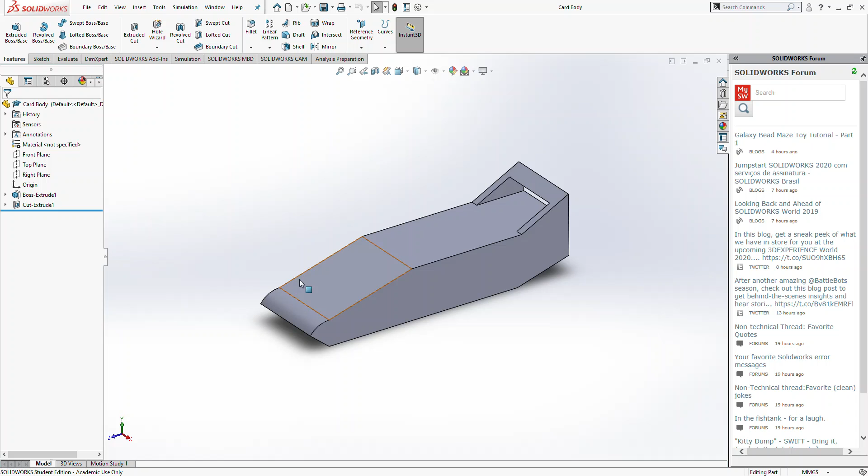In this video, we're going to look at the Revolve Boss Base tool and eventually generalize it to how the Revolve Cut tool works.

Both are the same as the Extrude Boss Base and the Extrude Cut, simply being that instead of going out in a straight line, it's actually going to revolve around a certain axis.

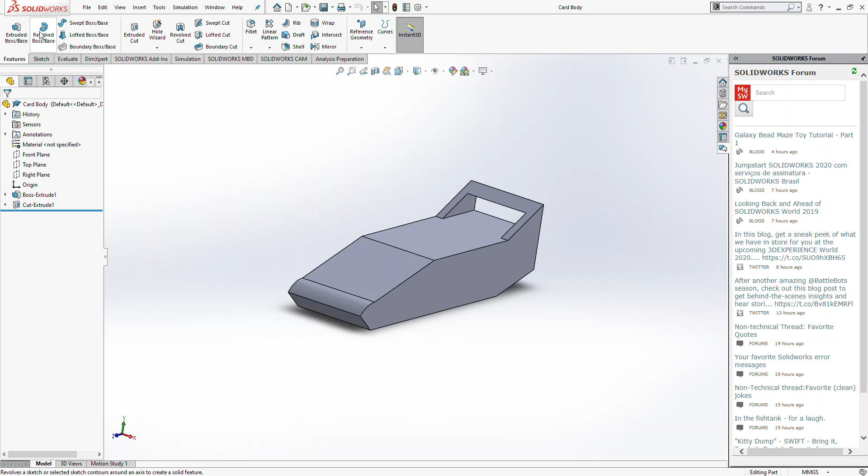So we're going to use this tool to create wheels for an actual car.

So we're going to go to File, New, and select New Part, and just open up a new part document.

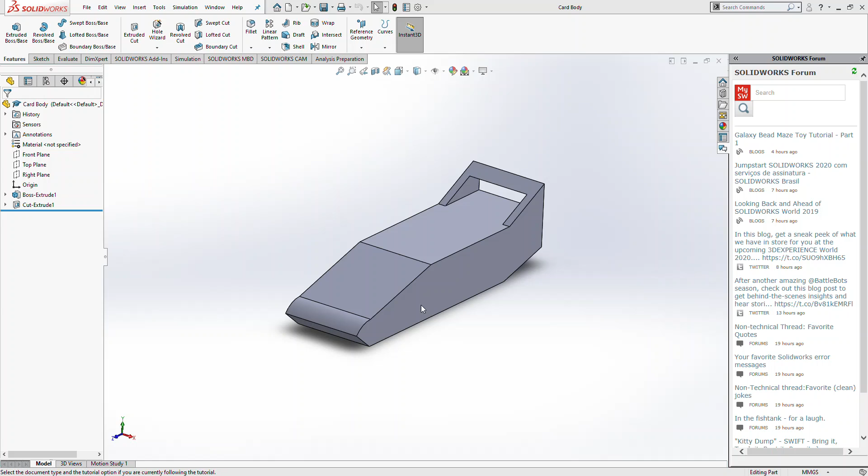Now what we're going to do is go to Sketch. As we know, all new parts start out with a new sketch. We're just going to go to Sketch and probably do this in a front plane, because we'll want the wheels to turn in a certain way.

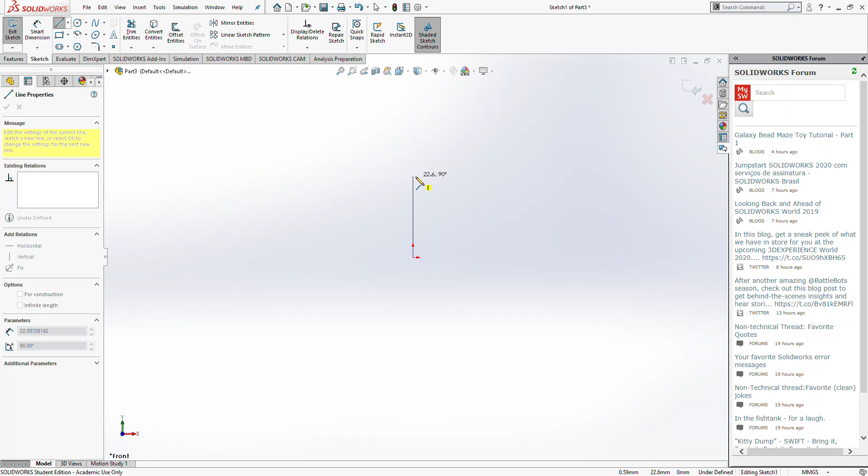So looking at this, let's start out with a basic looking wheel frame. Since we're revolving this wheel around a certain point, you're only really designing half of the wheel, or the wheel around an axis. So we want our wheel to be a certain radius length.

And then say have a certain thickness, have maybe slightly a bit of a rim to it, go down, have kind of like a center hubcap looking thing.

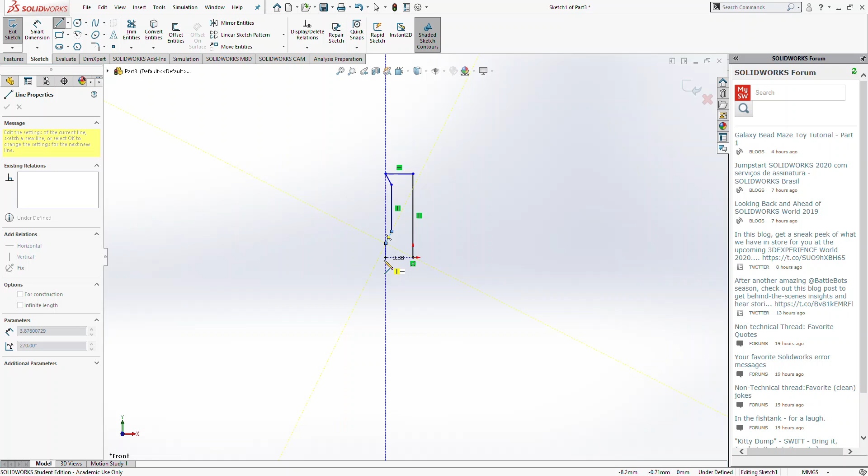So you can see it's a very basic shape that I've drawn with some lines. It's nothing super complicated, and it might look like just a random shape. But the neat part is when you actually begin to extrude it.

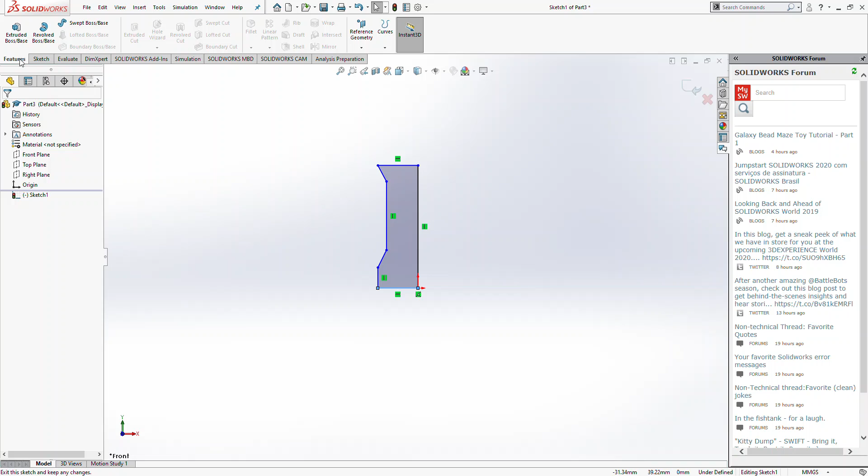So now that we have our basic sketch, you don't even need to exit the sketch. We're going to go to Features, and we're going to select Revolve Boss Base.

So looking at that, it's kind of a weird perspective, but as you can see, you have that outline traveling all the way around the part.

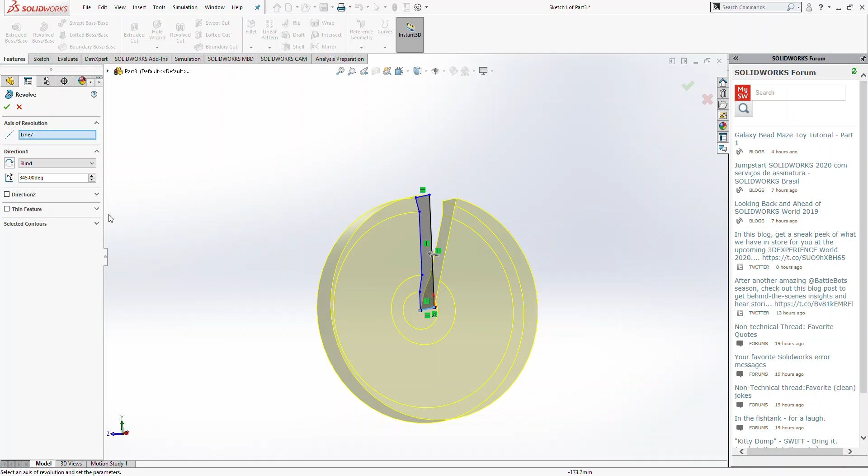So we could change the degrees of the part. That would mean, looking at a better angle, you can change how much you want the part to move around. If I wanted to, I could simply make this 345 degrees, and now we have a Pac-Man looking part right here.

Since we actually want our wheels to be functional, we're going to make the whole extrusion 360 degrees around an axis.

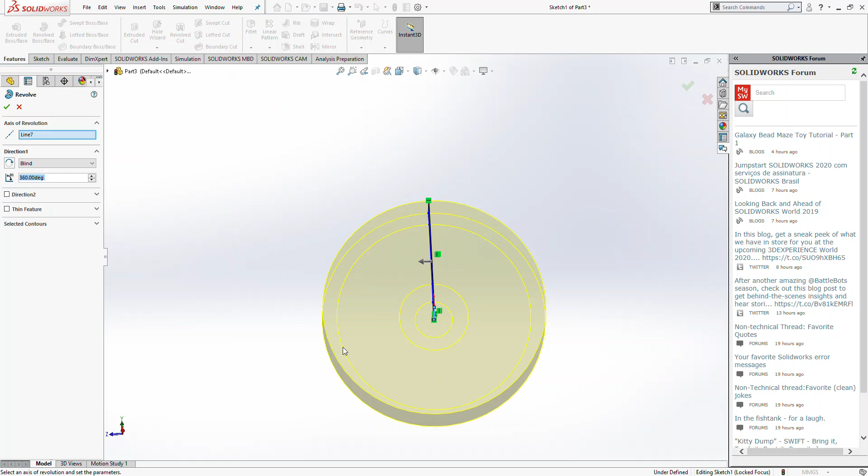Now the actual SolidWorks model does take a certain axis of revolution to be the default at the bottom, but I could easily change it at the side and make it look like a little cylinder thing.

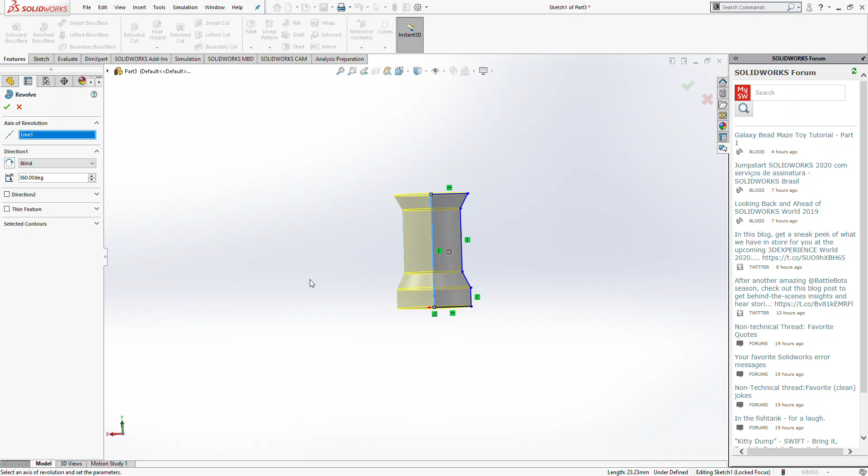I could revolve it about some other part. It doesn't really work with those parts, but you want something that's flat and just works in a certain position.

So we're going to go back here. Now again, we have a better looking wheel, as you would say. It's rotated 360 degrees, and all you got to do is hit check. Now you have a part that took a simple sketch and rotated it around a certain angle.

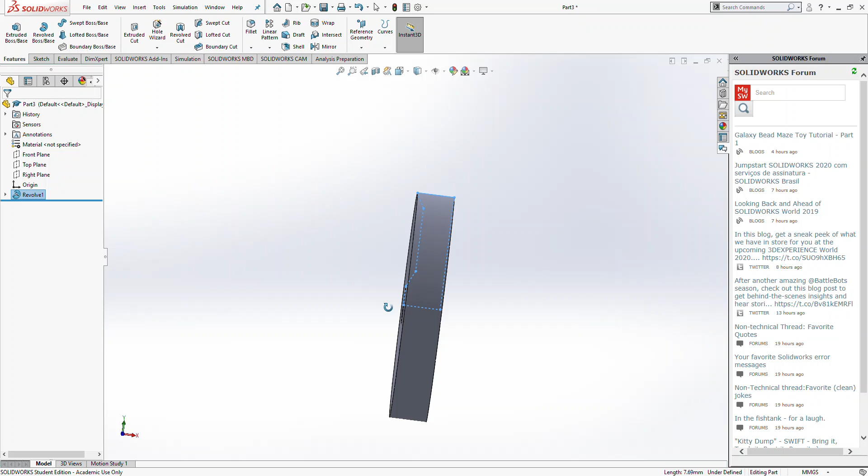And if you look at that, it kind of does look like a wheel. If you really wanted to make it look fancy, you could cut a center hole in it, where you put an axle. But this will do pretty much nicely for what we're trying to achieve.

And if you really wanted to, what I could do is select that, go back to the revolve, hit the base sketch, and I could actually do a revolve cut.

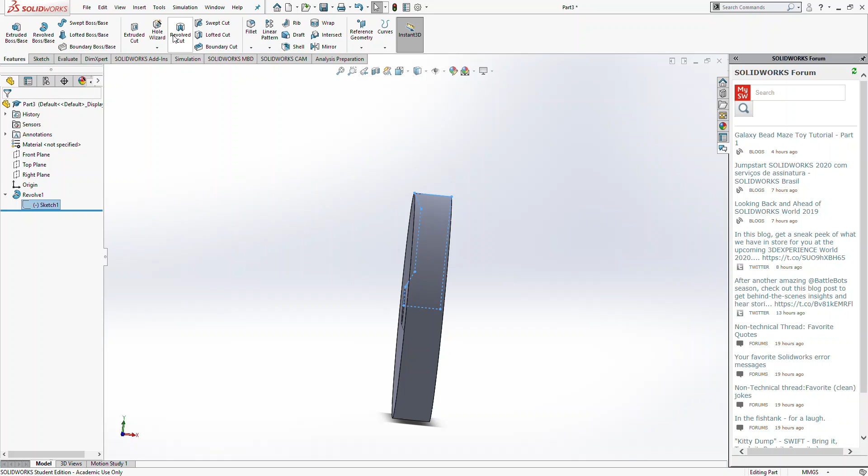As you can see, it doesn't look like anything right now, but if I were to select an axis of revolution, and let's just make it 90 degrees, per se.

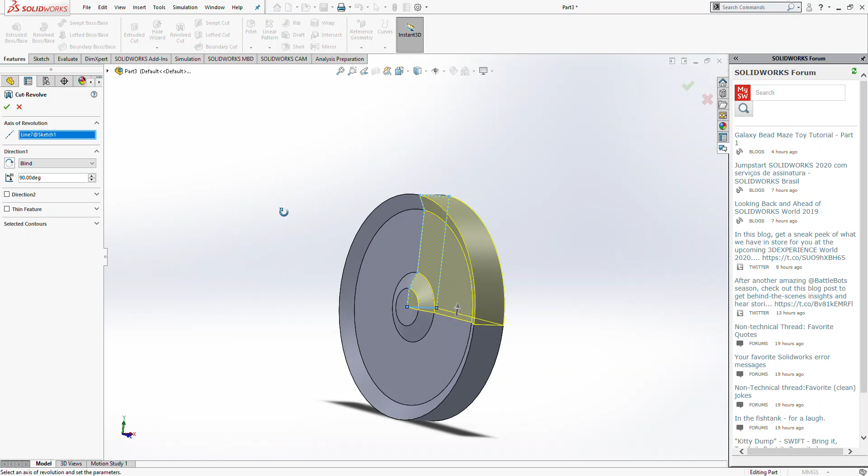What this is going to do is cut, much like the revolve boss base would. This will essentially revolve around a point and clean out everything in that shape.

Just to do it as an example, now I've revolved around that point and cut out a certain part of the wheel. Now we don't really need to do this for our wheel since it's plenty fine the way it is, so I'll just hit Control Z and bring the wheel right back to how it was.

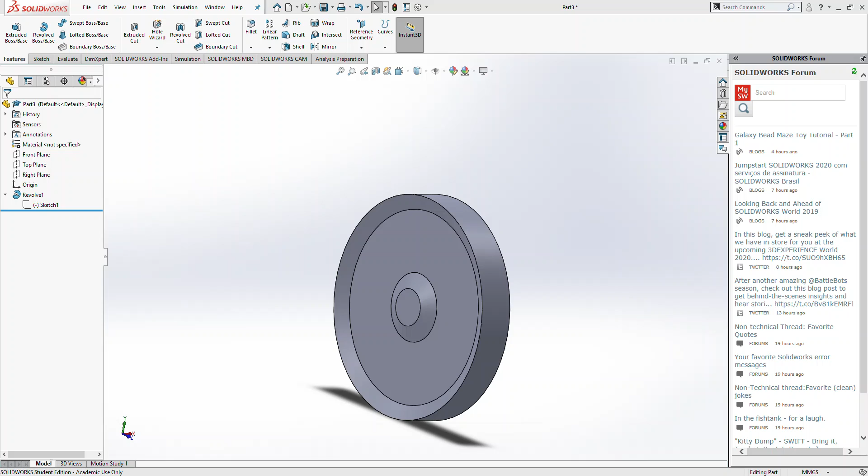Now all that's left to do is File, Save As, and we'll just want to save this as a wheel in our folder. That'll pretty much be all we need to do on that part.